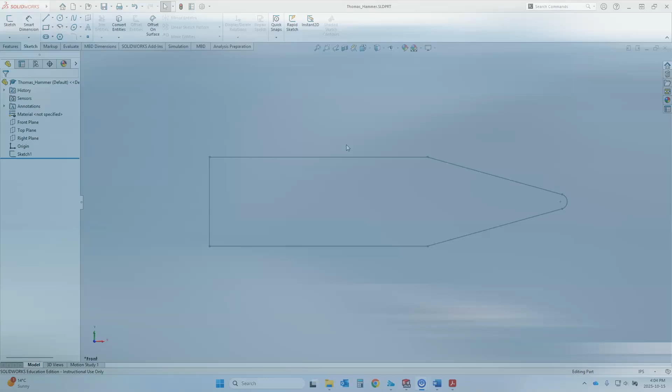Okay, so now that we have a completed sketch, our two-dimensional shape, we want to convert this into a 3D object. So we're going to do what's called creating a solid, which just means it's something with volume.

I'm going to make sure that the sketch I made is selected. In this case, you can see how it's gray, that means it's not selected. So I'm going to go over here, find where it says Sketch 1, left click on that. Now we can see the outline is gone, this light blue color, and all of my dimensions are visible. So I've got my sketch selected.

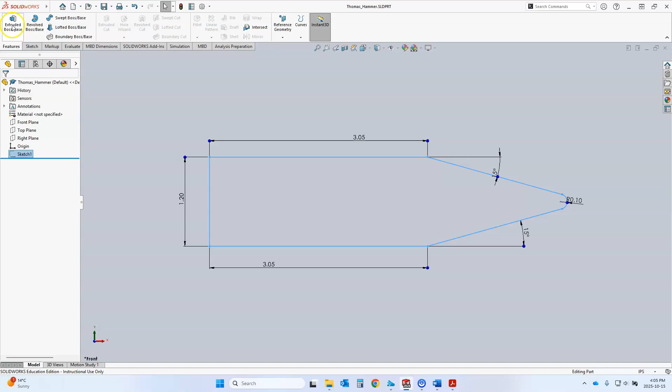I'm going to go up to my Features tab here and click Extruded Boss/Base. That just means we're going to take our shape that we drew and extrude it, like a piece of Play-Doh, which is pretty much what I want to do.

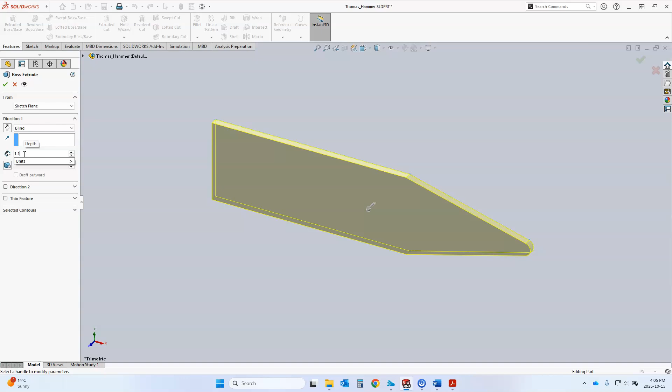Over here I've got some options. I want to have this set to blind, which is what it should be. And for this dimension, I'm going to type in 1.1 inches. So 1.1 and hit enter on your keyboard. It should look like this when you're done. And then hit the big green check mark up at the top.

Perfect. So now we have a volume that is roughly the shape of our hammer. It's still missing some details, but we're going to add those in just a second.

So the next thing that we're going to be doing is adding the cutaway, the slot at the top up here. To do that, we're actually going to add another sketch to define the shape of that slot.

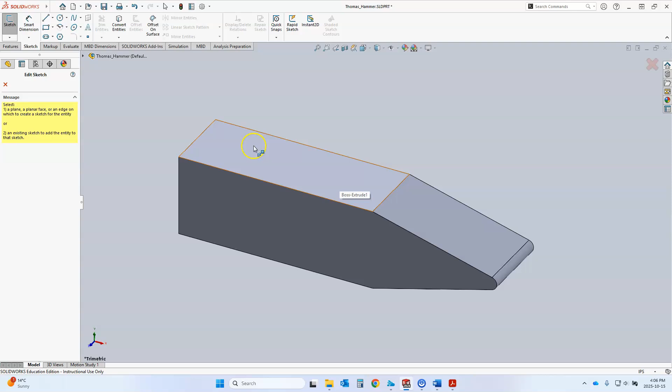I'm going to go back to my Sketch tab and click Sketch again. But now when it asks me to pick a plane, I'm going to click on this top face. See how it's got an orange outline? I'll left click here one time, and now I'm drawing a sketch on this top plane, which is what I want to do.

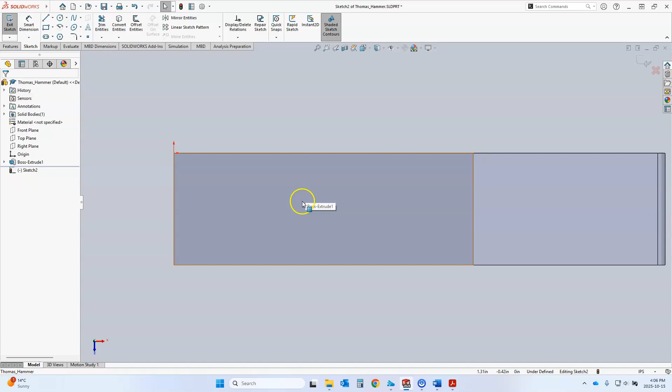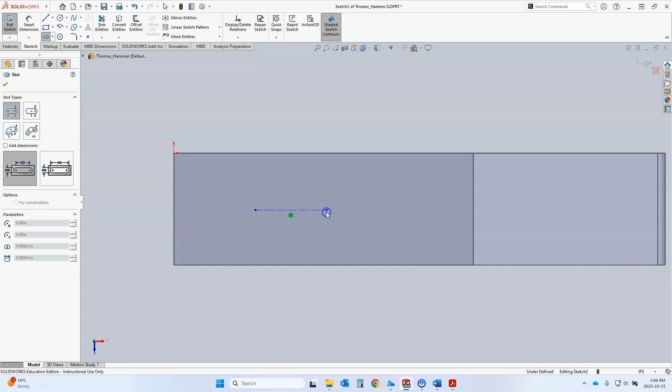Let's left click on that, go somewhere over here, and left click one time. We'll draw a horizontal straight line - that's going to be the middle of the slot. Left click again, and now I'm going to come out. You can see how that makes a wider or skinnier slot for us. So let's bring it out to around here. Now we've got our slot ready.

Now I just need to dimension it. Go back to Smart Dimension, left click on that. I'm going to add a dimension of 1.75 inches from this edge to that corner, to the center of that slot. So I'll hover until it's orange, left click, go to that middle point, left click, drag it up here somewhere, left click, and type in 1.75, enter. It shifted it over for us.

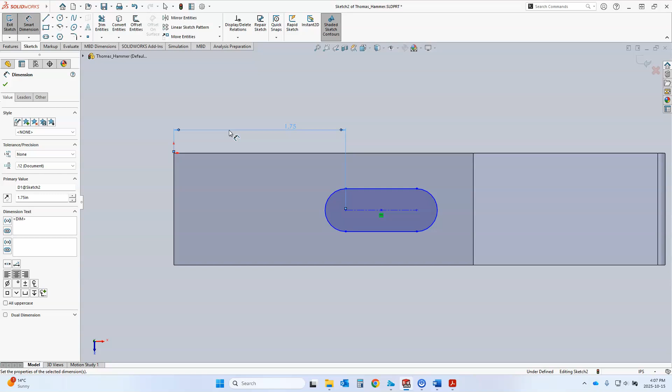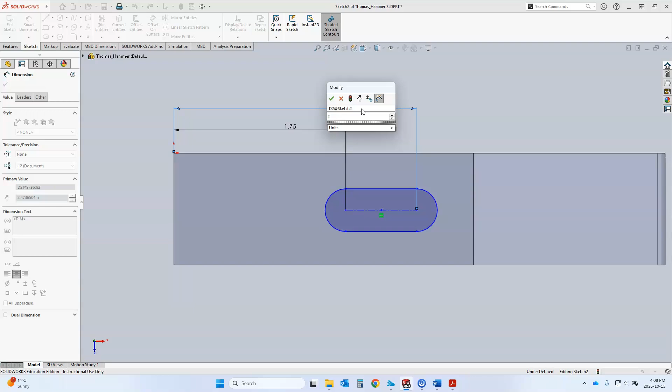Now this point is going to be 2.1 inches away from the edge. So I'm going to left click here, left click on that point, drag it up, type in 2.1, enter.

The last thing I need to do is set my vertical position. I want to put it halfway. You guys remember I extruded it 1.1 inches from here to here, so half of that is 0.55. I'm going to click on this line, that horizontal line, bring it over here, and type in 0.55, hit enter.

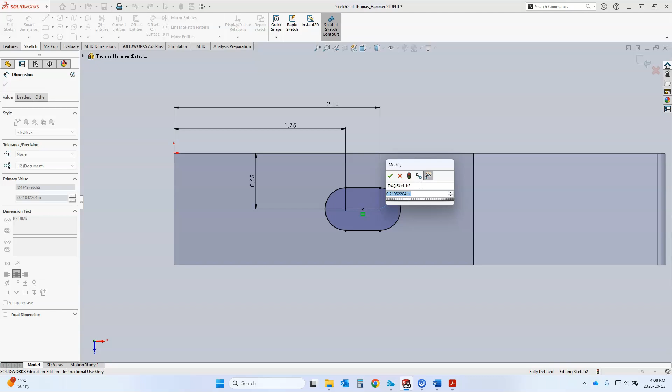The last thing I need to do is define how wide that slot is. I'm going to do that using the radius of this curve. Click on that - you guys can see how it's gone orange. Left click, drag it out, type in 0.26 and hit enter. That's going to give the width of that slot.

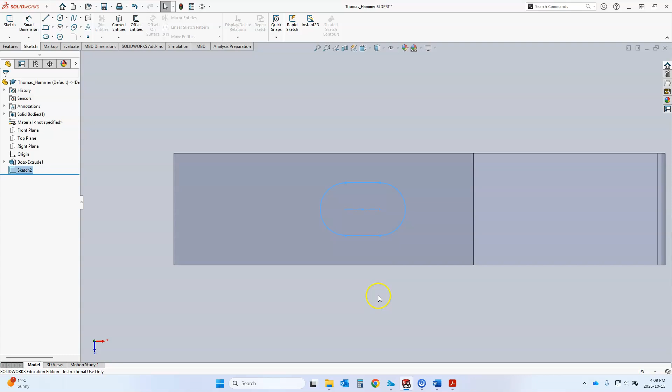So at this point I've got this shape fully defined again. I don't need to add any more detail, so I can click over here to exit my sketch. At this point I can just rotate my part. I'm going to hold down that scroll button and rotate my part a little bit so I can see it better.

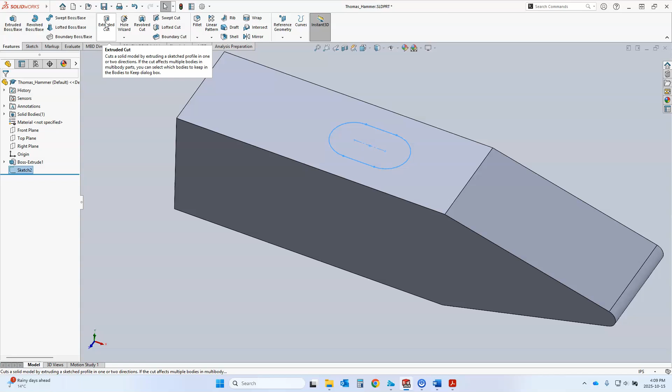With that sketch selected, you can see how it's blue. I'm going to go over to Features, left click on that, and instead of extruded boss, I'm going to do extruded cut. It's giving me a pretty good idea of what it's going to do, cutting all the way through my part. Over here, I'm going to change that from blind to through all, meaning go all the way through the part, and click the big green check mark. Now we've got a hole going through our part, which is what I was hoping to see.

Now we're going to add the chamfers, which are the 45-degree edges, the bevels that are going to go all the way around here. I can do that automatically as well. Under the Features tab, I've got Fillet, and if I click the arrow, I have Chamfer. So I'm going to left click on Chamfer.

You should get a window that looks like this. I'm going to make sure I have full preview selected instead of partial or none. I'm going to put my chamfer size as 0.03, enter. And 45 degrees is what it should be set to, and that's what we want. Now I'm going to select the 3 faces I want chamfered.

So I'm going to click in the middle of this one. Make sure you don't have a line hiding underneath like that. Make sure you're over top of this gray area, and you can see there's nothing else popping up, just a faint orange outline around this outside. So let's left click here.

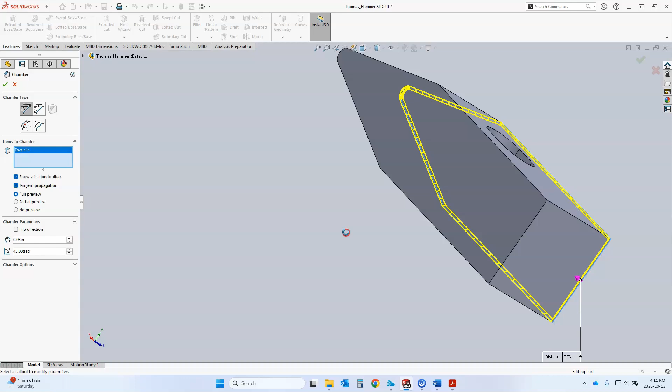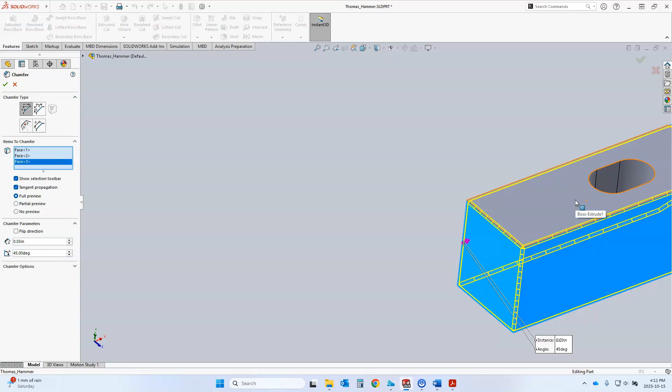Hold down that middle scroll wheel, move your part over, go to the opposite side, left click here. And we're going to left click this square face on the end as well. Now we've got our part looking like it's going to be chamfered. This viewport's gotten out of my way a bit, so I'm going to scooch it over. I'm going to hold down the left control button, hold down my scroll wheel, and just bring that view over to the middle.

At this point, I'm going to hit the check mark, and I've got this part chamfered. So all I've got left now is to add my 7-degree taper at this top edge here.

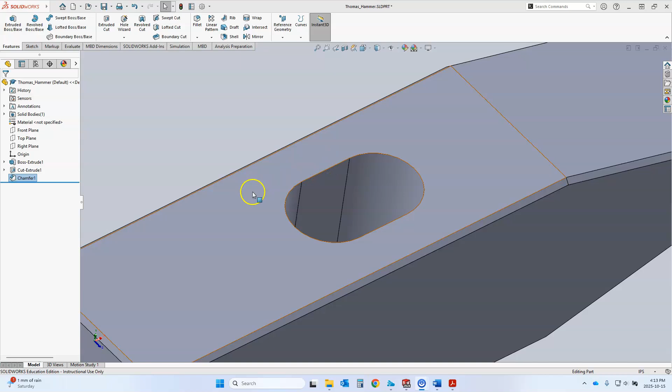So I'm going to use the chamfer tool again. I'm going to click on that drop down, hit Chamfer, and I'm going to click this top edge. Make sure you've got this orange line selected, not this one. Left click, and over here it says edge 1, full preview.

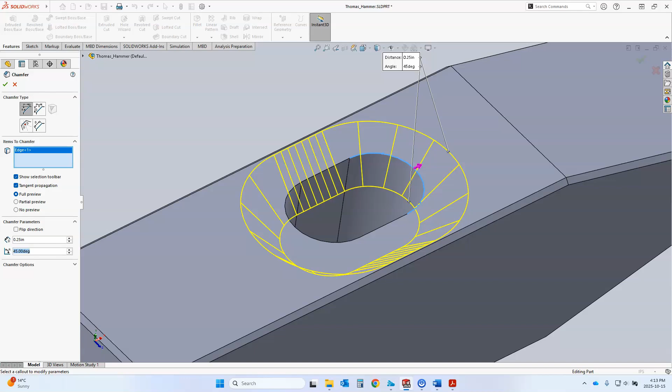That's what I want. Now my dimension is going to be 0.25. You can hit 0.25 and hit enter. And then instead of 45 degrees, we're going to hit 7 degrees. So 7 degrees has made it 7 degrees from this flat surface.

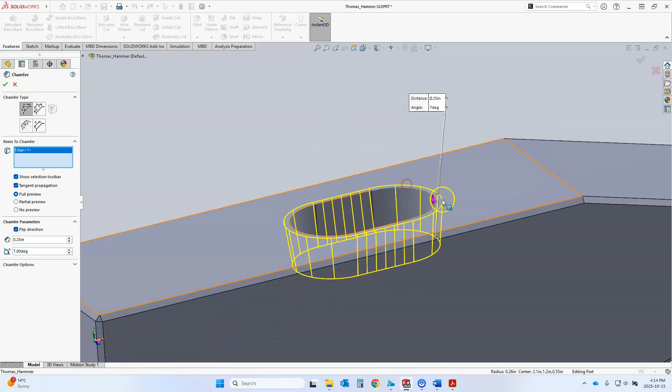We actually want it to be from this surface, so what we're going to do instead is hit flip direction. That's going to make it go down 1/4 of an inch and have a taper of 7 degrees like that, which is what I want to do. So that's the shape I'm looking for. I'm going to hit my check mark again, and I've got that top chamfer done.

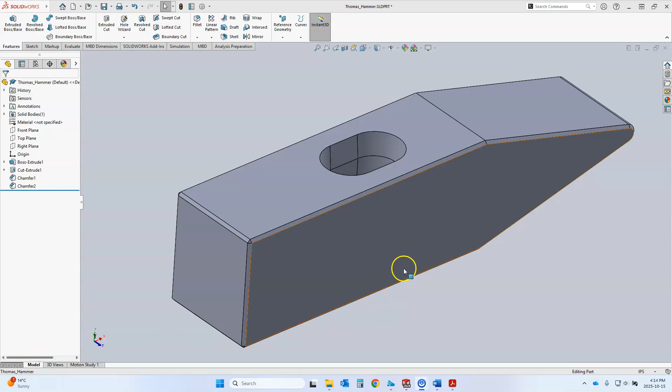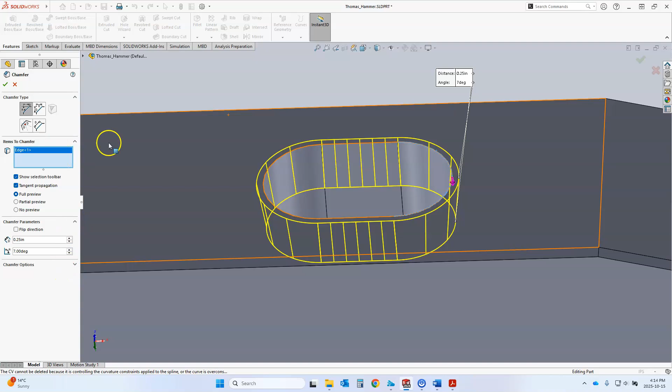Now that the top chamfer is done, I'm going to do the exact same thing on the bottom. I'm going to rotate my model around, grab that chamfer tool, pick my edge. In this case, it's remembered the settings from before and it looks right, so I'm ready to hit my check mark. And there we are.

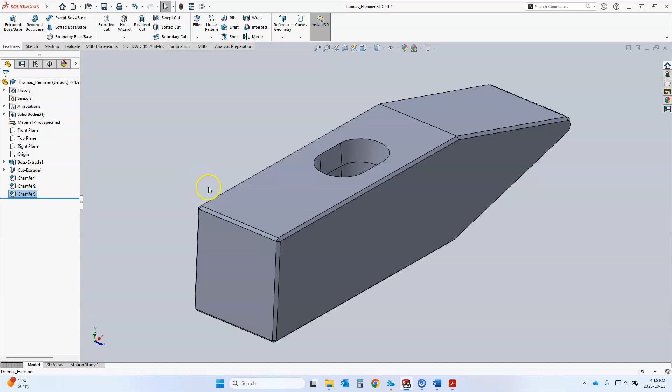So at this point, this hammer is now complete. It's got all the features done, it's got all these bevels on the side, and it's got the taper on top, and the shape is already correct. So at this point, we're done creating our solid, and we're ready to go to the next step, which is creating the drawing from this solid.